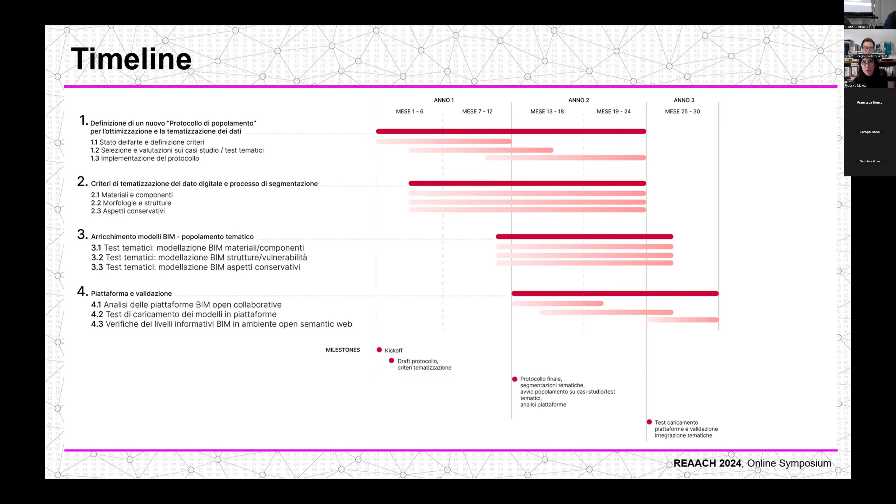The last step is related to the search for current opportunities for data sharing, to analyze what kind of new open collaborative platforms are usable in order to reach an additional main goal: interoperability and the spread of project results among main stakeholders.

As background for the project, I'd like to mention that another project was funded within the previous program, called eBIM. Now we call the project AIM-eBIM. I'd also like to stress that the state of the art is improving very quickly, so within the eBIM project, some very relevant shortcomings in the workflow were faced.

One is related to the platform for data management, as you can see in this screenshot. Even if the topic is very well explored nowadays, some challenges still need to be covered, and optimization of digitization is one — even if the tools and procedures are quite solid nowadays, the quick changes in devices need to be understood deeply in order to understand what kind of data we can obtain today with new tools.

Data thematization and segmentation is a process that is improving very deeply. We needed to test new parametric modeling processes in the optic of adaptive thematic population, and adaptive is a key word of the project, also thanks to simulations on BIM models with thematic data integration.

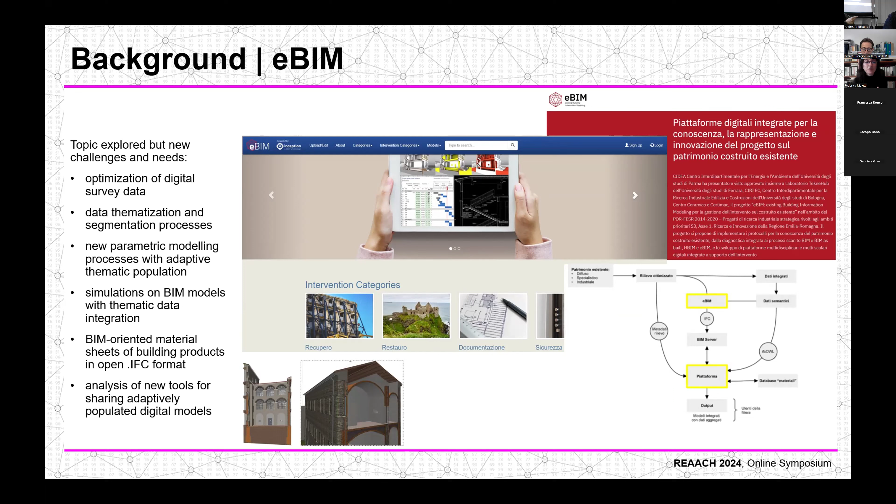The state of the art also includes all the improvements in BIM modeling. Here you can see just some examples of models performed by our research group.

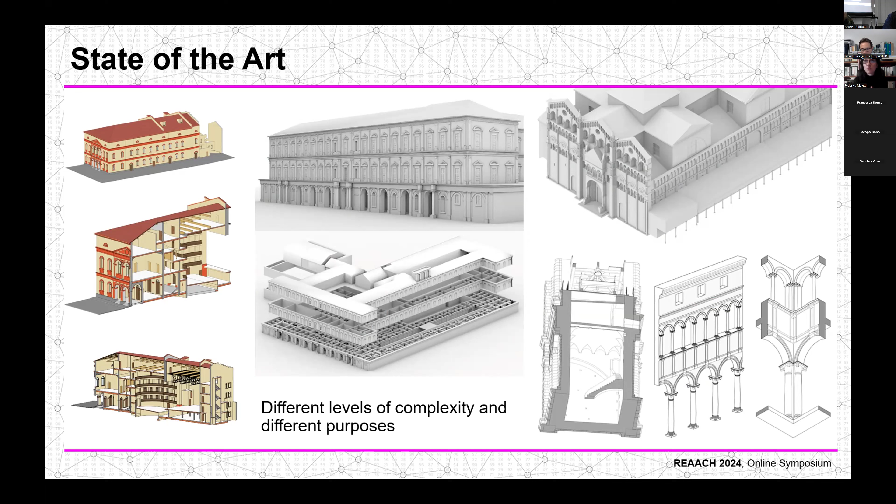Considering the needs for existing heritage and for historical heritage that differ due to the complexity of data to be integrated, the state of the art in this direction covers technical aspects, but also improvements in managing this kind of complexity that we can see nowadays.

The main advancement beyond the state of the art relates to digital surveying technologies, because we have more and more great amounts of data, often unused or untargeted for purposes of intervention on heritage, since they are difficult to discretize according to specific features and characteristics, and also due to issues of practical utility, and sometimes difficult to integrate.

I would like to stress that we should consider the research field and the professional or industrial field, which sometimes cannot match.

Companies and professionals very often are not keen on applying BIM modeling, and so infrequently adopt efficient data sharing systems. AI, of course, is at the forefront of the evolution of this process of improvement, and this rapid innovation needs additional integration within the construction sector to be more efficient.

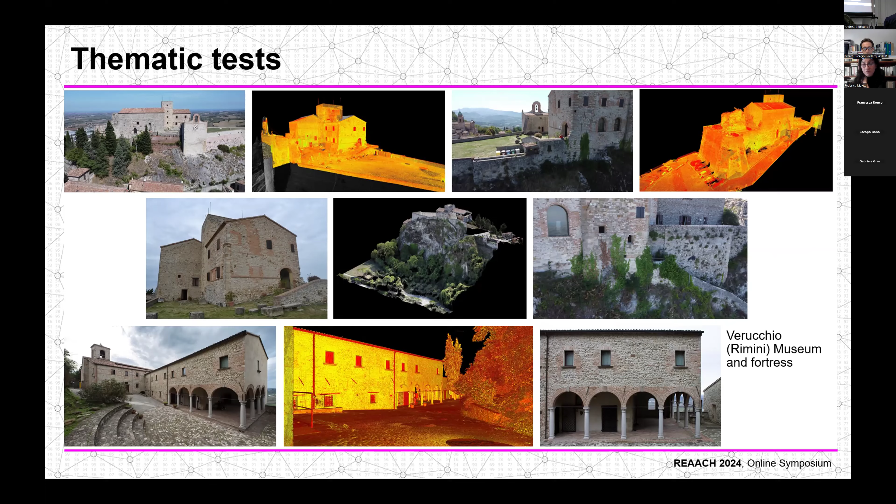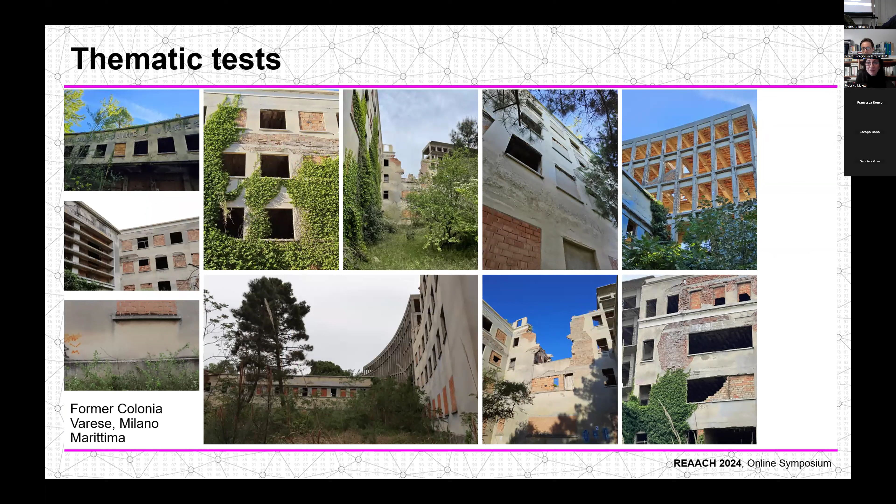But we are also working on a 20th century building. Here you can see the former Colonia Varese in Milano Marittima, which is under analysis. It's a very different kind of building, with different requirements in terms of understanding, modeling, and of course requirements for intervention.

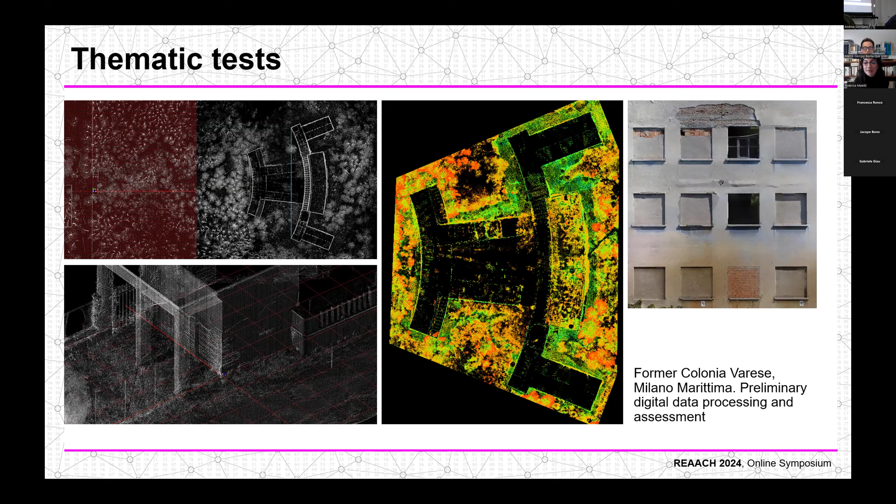Just some screenshots of the preliminary digital data processing and assessment that we are doing now.

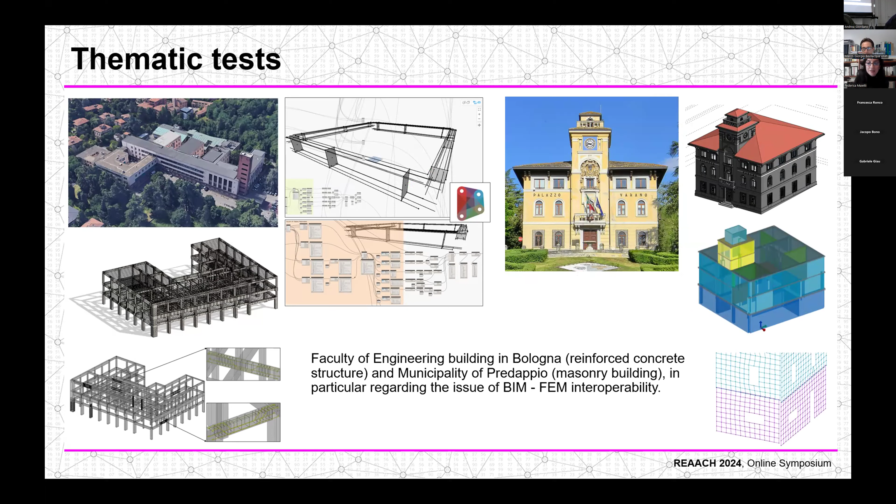Additional thematic tests relate to reinforced concrete structures and masonry buildings. This part of the research is covered by the University of Bologna, addressing the need to understand how to apply this thematic population to structural improvement requirements. Two case studies have been selected also for these purposes.

In parallel, while working on geometrically modeling these case studies, we are also working on the algorithmic procedures, testing the first section of the work on the Verucchio Museum, the historical building that is most complex to face.

We selected the data set to be segmented and classified using point clouds and photographic data sets. The segmentation is according to materials and techniques, and this part of the work started with the assessment of the incidence of the different features in classification.

Very shortly, the well-known procedure is the definition of an abacus of classes to be segmented. It's interesting to highlight that identifying classes is the focus of the work, and this step contains the interpretation issues.

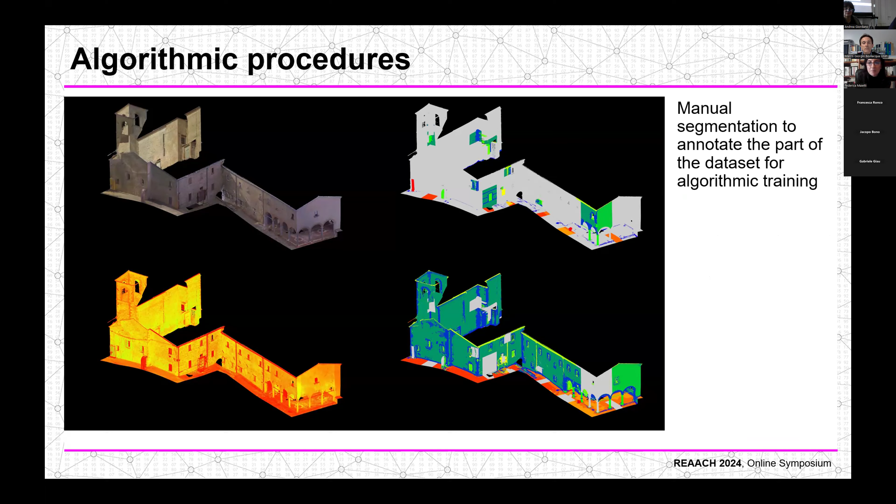We extracted geometric features with 3 different ranges, and proceeded with manual segmentation to annotate part of the data set for algorithmic training. Here you can see some screenshots of this process of selecting the main features needed for algorithmic training.

Then we tested two algorithms. One is random forest, with the procedure of splitting the annotated data set according to training and testing for the prediction of classes, and we also worked with an additional algorithm, KNN.

Understanding, on different data sets, what is happening in terms of calculation of the algorithm, and in terms of prediction of what is possible to use for feature extraction.

In parallel, we are working on BIM modeling of the same case study. We are in Verucchio once again, starting with the connection between the point cloud and the BIM environment. After visual analysis, as well as additional assessment and searching for other informational sources, we work on organizing the components according to specific nomenclatures, category, function, and other specifications.

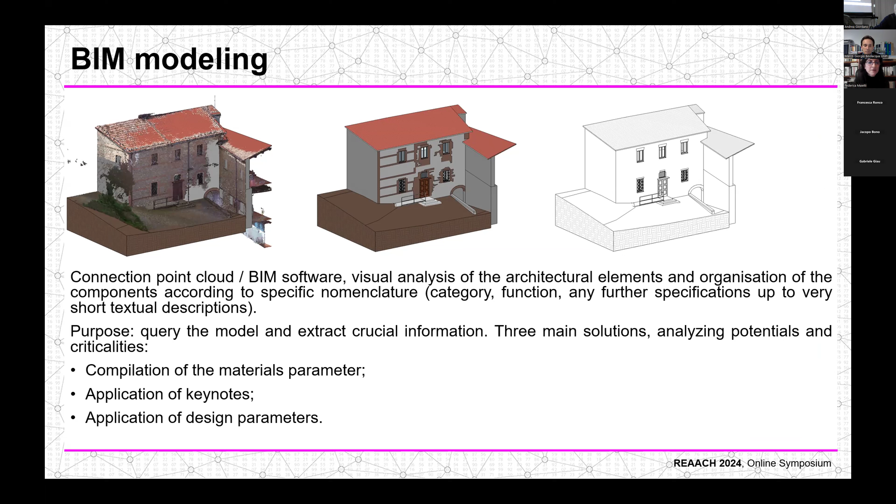That is, by filling in materials parameters, applying keynotes for specific features, or applying design parameters.

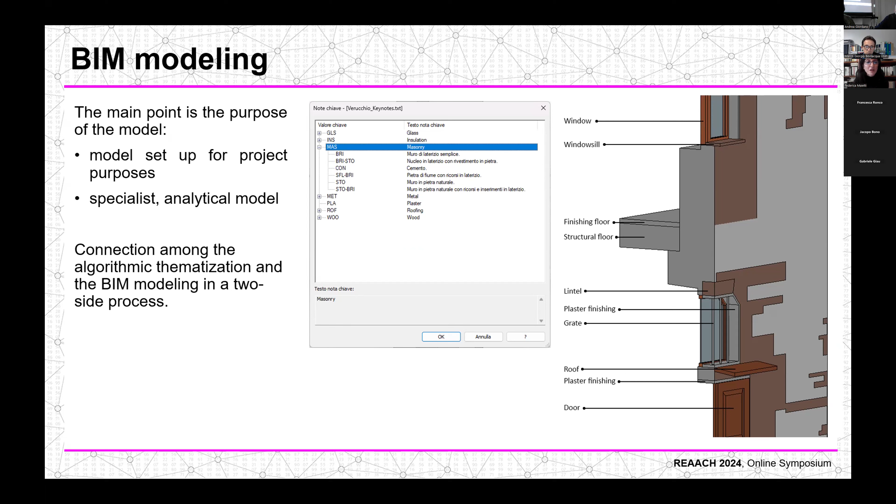Of course, the main point is the scope of the model. If it's set up for project purposes, the work will go in one direction; if the purpose is to perform a specialist analytical model, the workflow can be another. We are now processing these different actions to find the focus of the project: the connection between algorithmic thematization and BIM processing.

I'm going to conclude by highlighting 2 points. Experimentation is needed, because this project merges together different state-of-the-art processes, and the most important focus will be the connection among these steps. We are putting strong effort into analyzing data capturing requirements.

This is step 1 of the research, because the way in which data are captured influences the way data are managed by the algorithm, but also thematic assessment and the interpretation of features.

How segmentation can really support the management of specific parameters is the key question we hope to improve in the next steps of the project.